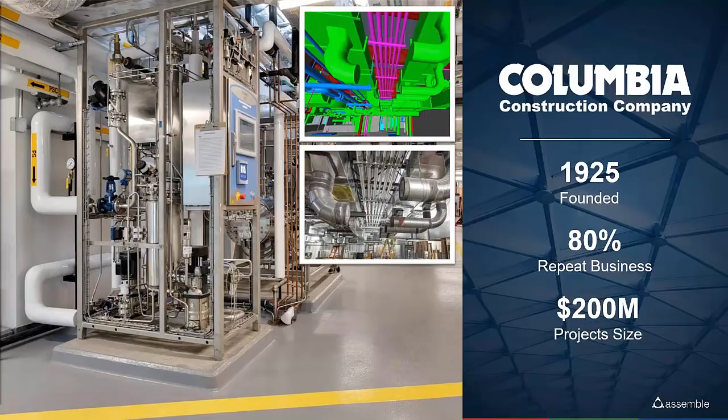We do about 80% repeat business, so we are very focused on client satisfaction, starting in pre-construction all the way through closeout. We do work in a lot of different sectors: academic, corporate, healthcare, hospitality, life sciences, and energy.

We're ranked as one of the largest construction firms in Massachusetts by the BBJ, and we're on ENR's top 400 list. We're a true construction manager and do not self-perform any work, but we generally take a lean approach across the board.

We have strength and experience with sustainable projects. We built the largest geothermal system in New England and have 2 net zero energy buildings under our belt already. We use virtual construction to increase efficiencies and to minimize changes, which I'll be getting into a little bit more in our discussion about Assemble.

Before we move on, I know you have some other stuff to run through here, but I'm looking at the photo here, and you guys have the job box with basically your coordination system on site. Is that something that's really heavily used for you guys?

It depends on the job, but we do find it to be really valuable. We have our job site kiosks, you can see monitor, computer, printer. The jobs it works best on are the ones we've done full coordination for. Superintendents will reference it, but even more so the foremen, so they can access the model, they can access the project documents from plans through submittals and RFIs, and all that information is right there on the job site.

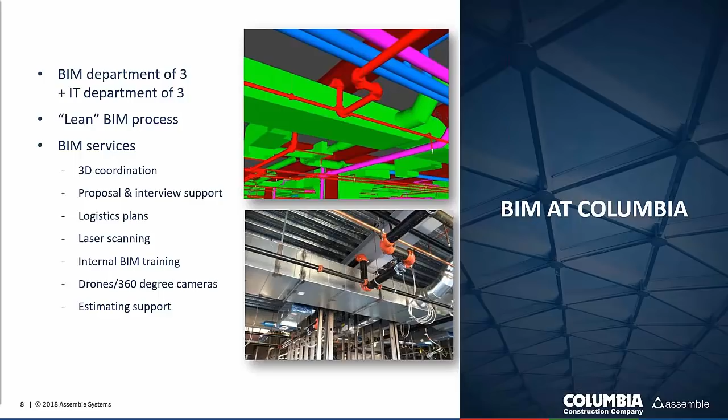The trick there, though, is to figure out what we can use the data for and what we can't use the data for, so we're selective about it. But yeah, with minimal resources, you can't spend all that time modeling. You need to really figure out where you're gonna get your most bang for the buck.

So let me get into that a little bit. With a pre-construction process, this is a very important part of our whole construction process in our relationship with the owners. This isn't my group, this isn't my slide, but this department contributes to our high client satisfaction and repeat business rate, and it is where we use Assemble, so I figured I needed to give it a little bit of its due.

Here at Columbia, pre-construction is very collaborative. We really work hard to get a full understanding of the project and eliminate all the variables so we can provide a clear and accurate budget to the project team.

We are often brought on board during pre-con, and the architects already started, right? They're already down this path of design, and we are kind of running to try to catch up as quick as we can. And we're trying to catch up, but we also don't have documents that have a lot of details. So having the 3D model can get us caught up much more quickly than just having the 2D documents.

Assemble really helps us tease through the information in the model, ask better questions, and clearly communicate our understanding of a project back to the design team and the owner. And the better questions we ask and the conversations we have, the better our budget will be.

And our estimators find Assemble particularly helpful during the earlier phases of design. In a couple minutes, I'll get into one specific project with some very specific examples of how Assemble has helped our estimating team. But first, I'm going to take a step back and give everybody an idea of what getting model data to our estimators without Assemble looks like.

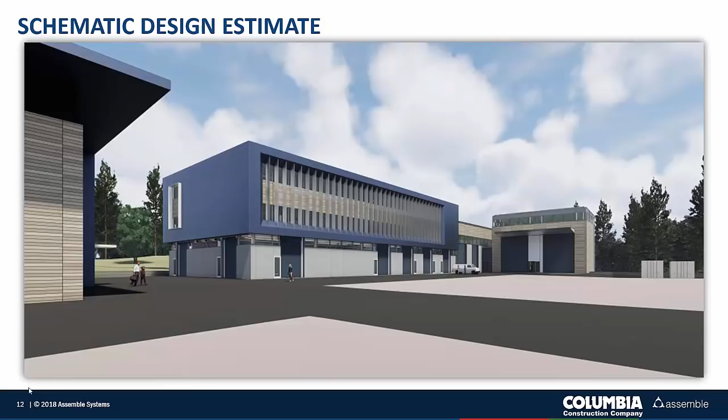Even just to pause for a second, even the visuals, the isometric views that you get when the designer's actually using Revit and adding these to the plan set, provides such a huge value for that quick understanding of what the project is, what it looks like.

Oh, absolutely. Even when we're looking at 2D sets, even with isometrics, it doesn't always give you that view of the building that you have a question on. On this particular project, you get the isometrics, you get a pretty good feel for what the building looks like, but the real information that my estimators need is on the 2D elevation.

And for that hidden side of the high bay garage, the spot highlighted with the cloud and the arrow, that wasn't called out clearly on the 2D elevation. So my estimator had to make an assumption. He assumed it was metal panels, put it in his estimate, and off he went.

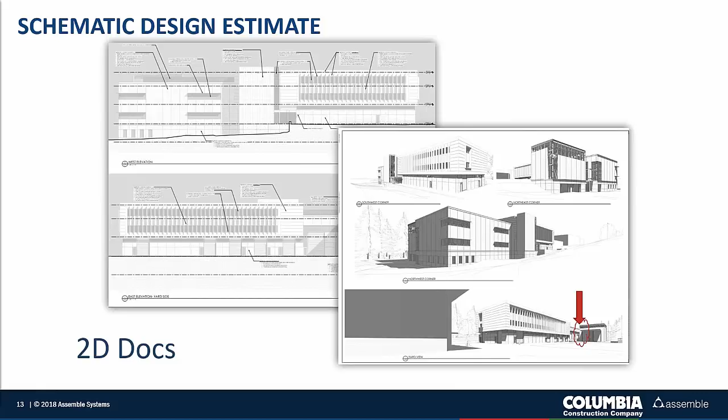So then, while they were reviewing the estimate, it came up that the designers had a model, and my estimator said, oh, that's fantastic, would you be willing to share it? And they said, sure, we can share it, that's fine. So I got the designer's model, published it into Assemble, got it over to my estimator, and he was able to get a much better view of that side of the garage that he hadn't been able to see before.

And it made it super obvious that, in fact, it wasn't metal panel, but it was curtain wall. So he quickly figured out that he had to adjust the estimate he had given the owner.

But what it also gave him was the ability to quickly compare his original takeoff to the takeoff of the quantities that Assemble gave him for all the exterior skin. So he was able to say, oh, otherwise my exterior takeoff looks pretty good against this model, so I can trust that these quantities spit out by Assemble are good.

So he was able to pull those in, plug them into his estimate, and send the owner an updated estimate very quickly and say, hey, this is what was going on. See this picture, I hadn't realized this is what it was. Now that I know that, here's the updated estimate.

That's great, and it often in that situation too, it almost opens up for value engineering or opportunities for adjustments on either side, the budget or the design.

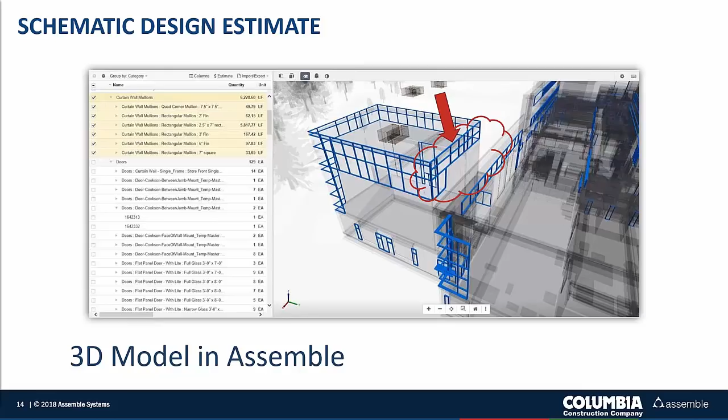Without a doubt, and it can give the estimators a real good basis to say, hey, if we change this in value engineering, this is the quantity, and this is going to be the impact on the budget.

So, on to design development. The owner wanted a little bit more feedback, so we got the DD set. We requested the model again, got that up into Assemble, and the estimator was very quickly able to see what had changed.

What my estimator was concerned about, having realized that had disappeared, was whether the footprint of the other building had changed. With Assemble, he was able to very quickly see no, it hasn't changed. Therefore, some of his assumptions and quantities from the first go-around should probably still be good, giving him a quick understanding of what had changed and what had to be adjusted in his estimate.

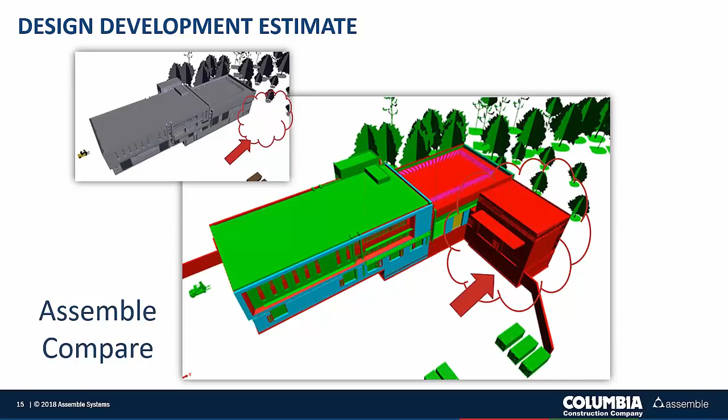A big part of this particular design development estimate was the envelope, the exterior skin. This is a part of the model that our estimators use Assemble for regularly. In fact, the more complicated the exterior gets, the more useful Assemble is for understanding the scope and for pulling quantities. For example, my estimators love getting curved wall quantities from Assemble because they're a pain to calculate. If you can just click on it and get the quantity, they love that.

Assemble can also be helpful with exterior walls that have multiple layers, such as screens or setbacks that are difficult to communicate in a 2D drawing. We generally find that there are some scopes that are more consistently useful than others in models from the architects. For example, my interiors guys like to pull light fixtures and door quantities from Assemble, and my mainstream estimators like to use it for structural, both for concrete and steel, and for exterior walls.

In this particular example, you can see that my estimator color-coded the exterior walls, which is super easy to do in Assemble. There are four different types of exterior skin in this design: Taktl wall panels in orange, insulated metal panels in green, precast in gray, and curtain wall in blue. As the estimator was going through and reviewing the model against the 2D documents, he noticed some discrepancies.

So real quick before we jump to the next slide, you kind of explained the color coding here, but can you talk about the capabilities in Assemble that get you to this point? I just want to make sure we clarify that this is just a quick filter and color by properties. Can you talk a little bit more about that?

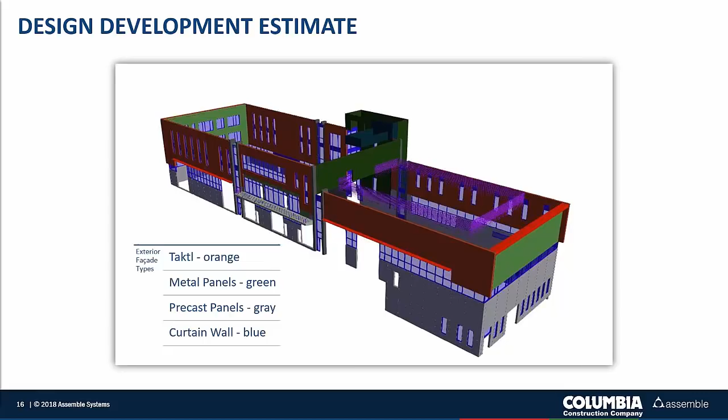And Assemble really allows that as easily, probably more easily than their 2D program that they use. Sure, and yeah, we want to keep that flexible so that whether you're looking at exterior skin or anything else by any property, it's super simple to use.

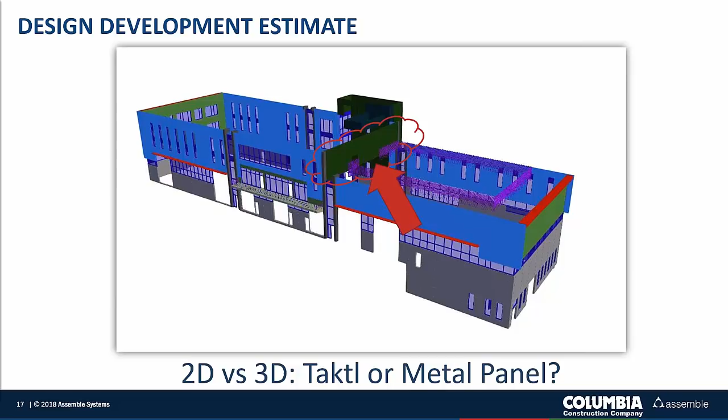Absolutely. So one of the discrepancies that showed up between the 2D and the 3D, when he started color coding and looking at it and understanding the 3D in the model versus the 3D he made in his head versus the 2D documents, was that this panel in the middle, the one circled with the arrow, was modeled as metal panel, but the 2D documents had labeled it as Taktl. Looking at the building as a whole in the model, it made more sense for it to be a metal panel. So he gave the architect a call.

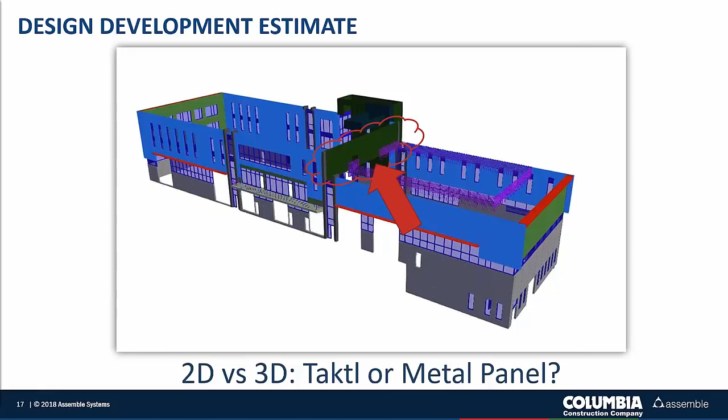He said, hey, I'm seeing this discrepancy, it doesn't really make sense to me. And the architect very quickly said, oh, you know what, the model is clearly correct, the annotation in the 2D document just hadn't been updated yet. So my estimator was able to adjust his estimate to appropriately reflect the design intent as opposed to what was shown on the drawings prior to the next submission of the estimate. So he was able to more accurately reflect the intent of the design.

And finally, my estimator was running out of time before the last estimate was due. In Schematic Design, he double-checked the 2D concrete quantities against the Assemble quantities, and they matched up. So he was pretty confident that the design model had accurate concrete quantities. And as you can see in this graphic, that foundation wall isn't a one-level foundation wall.

So the way to calculate that quantity in 2D is actually pretty time consuming, but he was able to very quickly pull those quantities out of Assemble. The numbers made sense to him, and he was confident in them based on his previous review of the model. He was able to pull them out, plug them into his estimate, and submit them on time. Assemble really allowed him to spend more time thinking and less time on the quantity takeoff part, and still get his estimate in on time.

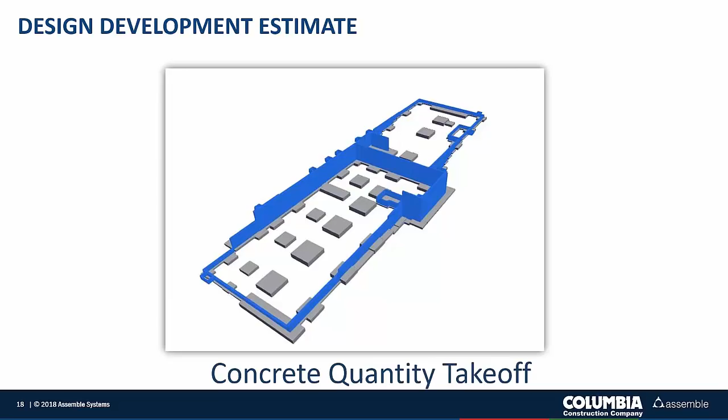Perfect, because it is in those situations when you've either got no data to go off of and you're going to use a subcontractor's number or a plug number based on gross square footage, or you can pull the relevant data and back check it, make sure things look good, and move forward with quality data. I think that's fantastic to kind of illustrate.

So in summary, as Tim said at the beginning of the presentation, Assemble really has democratized BIM for my estimating department. It provides an avenue for quantity takeoff, it's great for visualization, and most importantly, it provides an effective tool for communication in our highly collaborative pre-construction environment. It's added BIM value to the estimating department and helped free up resources in the BIM department, which is great for us—really a win-win for Columbia. Thanks to Assemble, we're able to utilize our models much more efficiently.

And you talked about several cases where you need to pick up the phone and call the design team to have a conversation about some particular component, or through the course of internal meetings, you're using the visualization to drive that. That's the idea—it fits so many different use cases or workflows around getting quantity data out of that model and leveraging it for a lot of different applications.

But I think in my mind, it always comes back to that first point, which is the communication. It certainly allows for a deeper understanding on both sides of what's being reviewed, the type of information that's being leveraged, and it shortens that cycle where you're just staring at your screen, clicking, to quantify things in 2D. So it enhances that kind of back and forth between all team members, and I love that aspect of the tool and of what we're doing as part of the VDC space in our industry. Seeing what Columbia is doing certainly resonates with me.